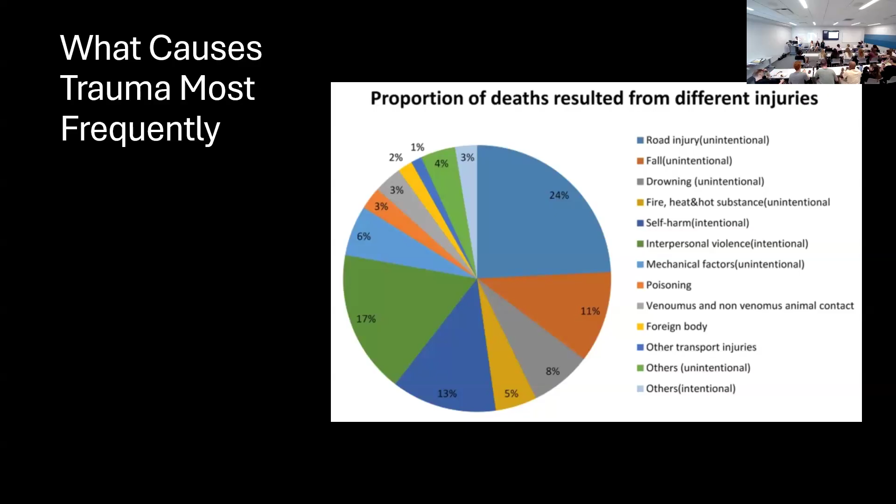They can't hear. Got it.

Why do they matter? If you think about the importance of transportation systems in any country or empire that's had any amount of influence, you have to have a good transportation network, right? But if a transportation network isn't done right, it can cause problems. If a transportation network is done right, what does it foster? Well, it fosters economic opportunity.

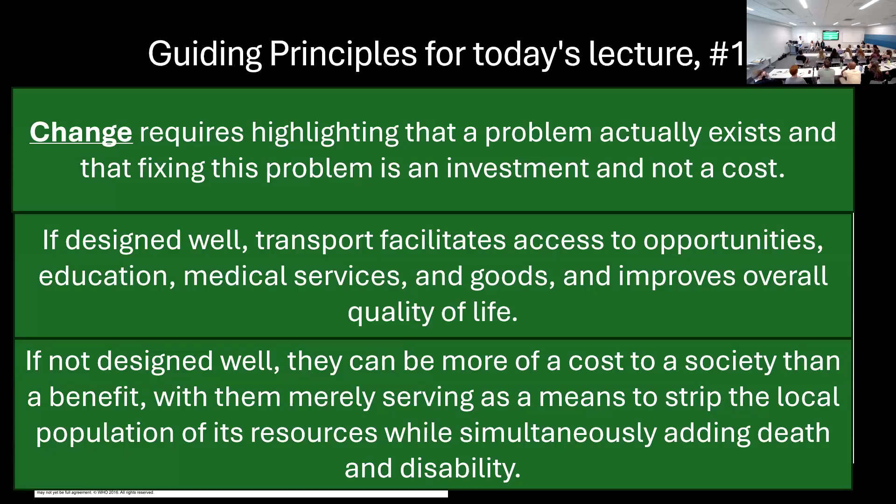If designed well, transport facilitates access to opportunities, education, medical services, and goods, right? And improves overall quality of life. But if not designed well, transportation can be more cost to society than a benefit, with it merely serving as a means to strip the local population of its resources while simultaneously adding death and disability. That last statement is more important because it kind of gets towards justice, fairness, and equity.

This is a driving lesson that one of our first fellows, Dr. Solomon, gave me when we were traveling through Ethiopia. Let's play this for you.

You guys can listen. Dr. Solomon, what's it like driving in Ethiopia? Wow, very difficult driving, but you have to be cautious and fast, very fast, because you see a lot of cars coming and the people are also going here and there. Look. Are there no crosswalks? There is a crosswalk, but they don't follow the principle of traffic. Simply they came and they challenge you. Interesting. What about stoplights? No stoplight at all here. Stop signs? I haven't seen here. What about a yield sign? Yield also is not available. The stop sign is removed sometimes by hooligans. They remove it and they sell it.

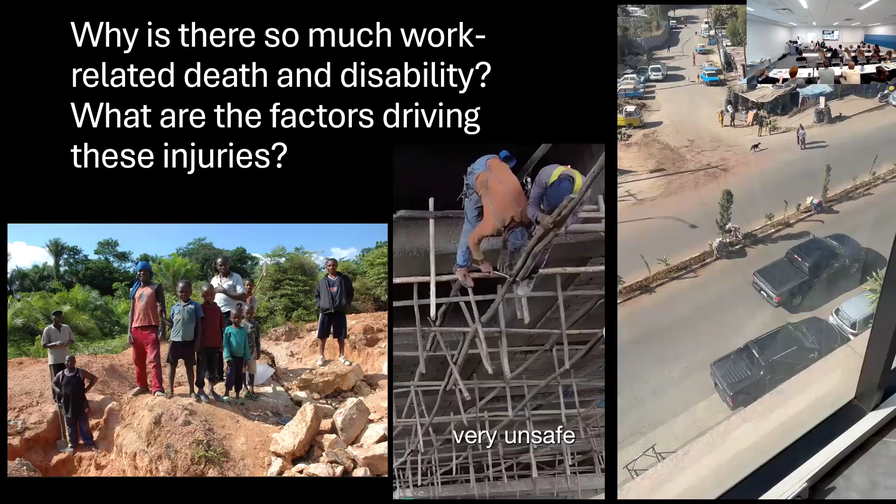All right, why is there so much work-related death and disability? What are the factors driving these injuries? Here's an example. You can see some children working in a mine, so you have child labor occurring. And how skilled do you think a child is at digging diamonds or platinum or gold out? And you can see they don't have much personal protective equipment here.

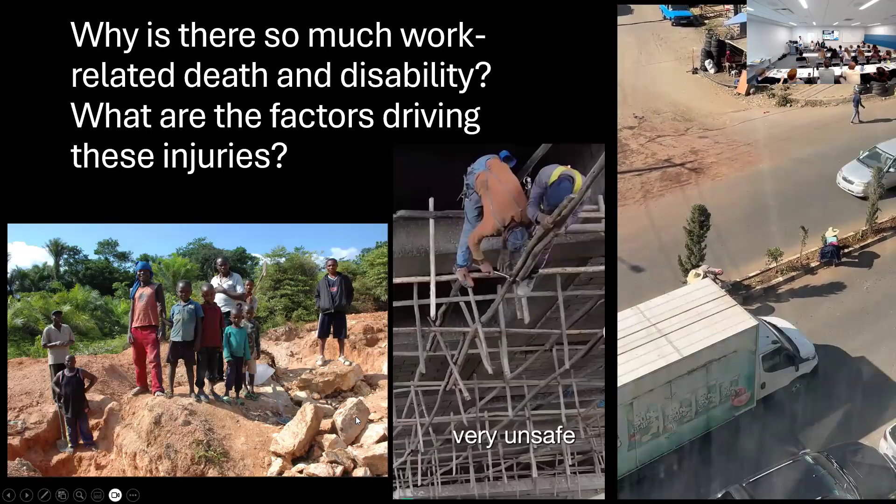Here's some individuals working on scaffolding in Ethiopia. I think Bakker took this picture while we were in Ethiopia. And I'll just play this here. This is just in my hotel, showing some people working on the side of the highway. If somebody's working on the highway in America, there's some type of safety barricade put up. But this is how these people work. These are hardworking people, with all these risks for injuries. You can see why their trauma centers are so busy, and why work-related injuries are so high. See, they're having to beat the dogs away with a stick.

Statistics. So when they polled construction workers in Ethiopia in one study and looked at their risk of a work-related injury, 84% of construction workers in Ethiopia had a work-related injury. 84%. High, right? So why is this? Progress, if not thought out, can come at a heavy price.

One of the things we mentioned at our last lecture was what is driving this trauma epidemic. There's this process called chaotic industrialization, a process where you have certain industries being built up at an uneven rate. You have a continent like Africa that's rich in natural resources, particularly resources that we want now for developing renewable energy technologies, as well as powering our old technologies, such as copper. Richer nations want these resources.

If we need to get them out, roads need to be built that connect to these mines. And there's nobody necessarily looking over these mines and making sure they're safe. So you have industry in mining and transportation being built up quickly, not necessarily well thought out. We'll discuss that a little bit. And the healthcare infrastructure isn't being built up as well.

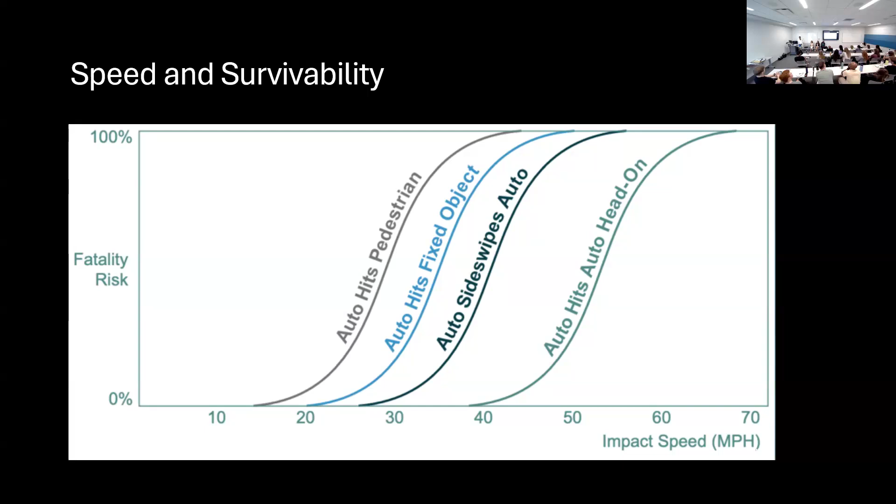So yeah, let's look at this. So we'll just go through a couple things. So speed and survivability, you kind of talked about that, right? It's kind of obvious. The higher the speed, the more likely the mortality. And so these are things that you want to take into account. What is this here? Minimum lane width.

So at least in the US, we have what are called controlling criteria. So any road built with federal funds, as well as especially any interstates, have certain criteria they need to meet. If they can't meet that, then an agency has to prove to the federal government why they're not meeting that and that it's not going to cause a significant safety or operations issue.

So lane width is one of those. And again, this lane width varies based off your roadway type. So on our interstates and freeways where people are going to be going faster, we want wider lanes. You don't want too wide, but you want wide enough. So 12 feet tends to be the standard on our interstates, and 10 to 12 feet for our arterial. So those are our higher speed roadways.

They can be freeways, they can be roadways like Southwest Traffic Way up here might be considered an arterial. And so those you want a 10 to 12 foot width. Getting too narrow, you run the risk of people leaving their lane, getting into the opposing lane. Sometimes on local roads, though, we want that narrower lane to slow people down because they do feel cramped and you have that risk compensation that you inherently have that you will tend to drive down.

So yeah, when we have narrower lane widths, we run the risk of what are called run off the road crashes, where you leave your lane and go off the side of the road or into the opposing lane where you would have a head-on crash, as well as your sideswipe crashes of hitting the vehicle next to you. And we have data that helps kind of show these and the association between crashes.

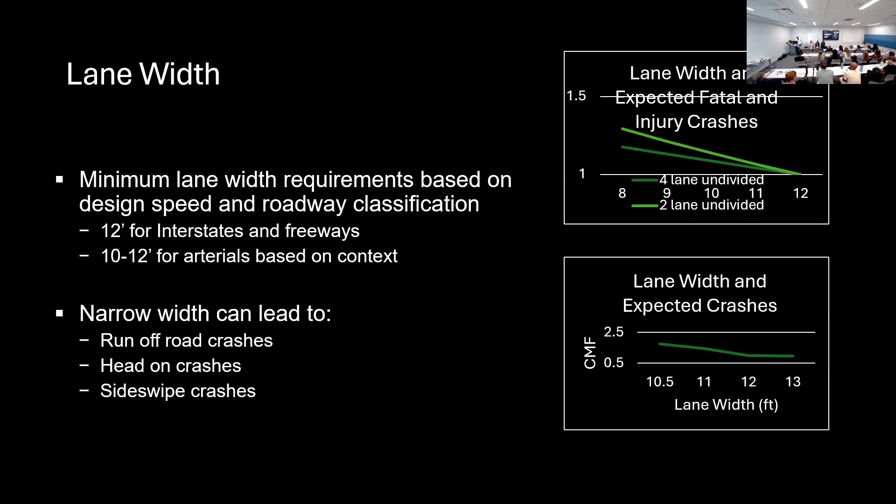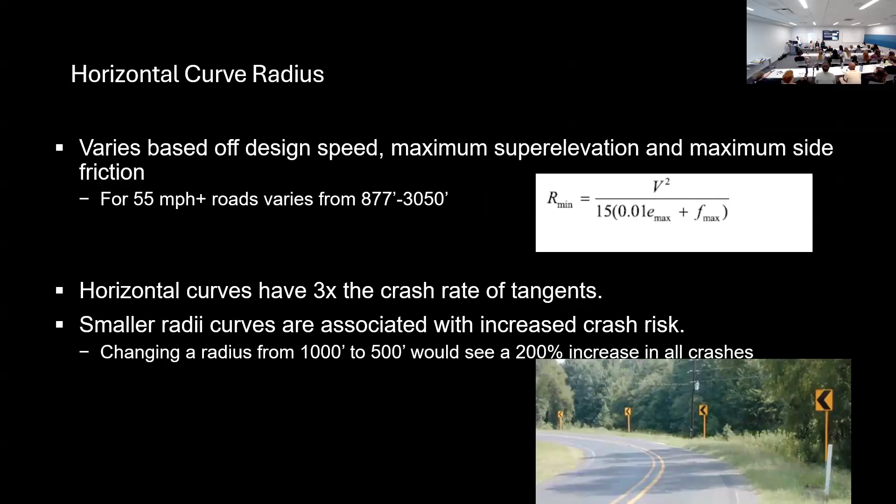And not only does lane width matter, shoulder width matters. Important part. The horizontal curve radius matters, if you can imagine. Curves tend to be one of our most dangerous. Curves and intersections are really where the majority of our fatal crashes happen. So a curve segment compared to a tangent segment, so a straight segment, you'd see about 3 times the crash rate on a horizontal curve.

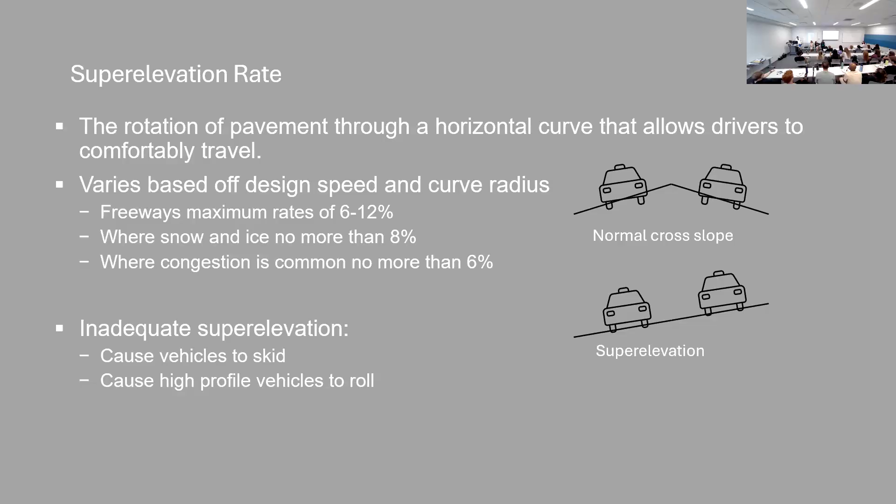And then the rotation or the superelevation rate? Through curves, we get what's called superelevation to kind of help with that centripetal force and help keep you in your lane so you don't skid. You have to think about stopping sight distance.

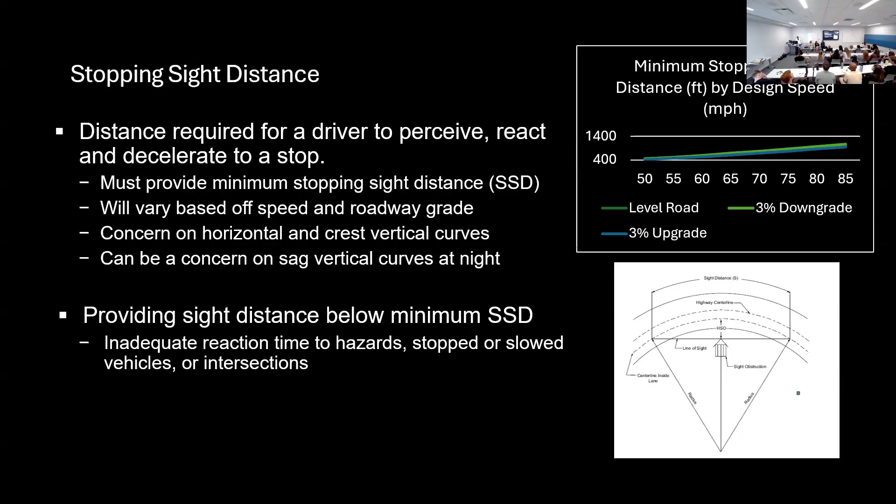On our roadway, again, just making sure you're able to see far enough ahead that if you come up on a slow vehicle or a pedestrian or an object in the road, or even an intersection, that you're able to properly react. And then you need to take that into account when you're talking about crest curves, like when you're going over a hill. Yeah, coming over a hill, or going down. Going down, especially at night, the down tends to be the biggest issue.

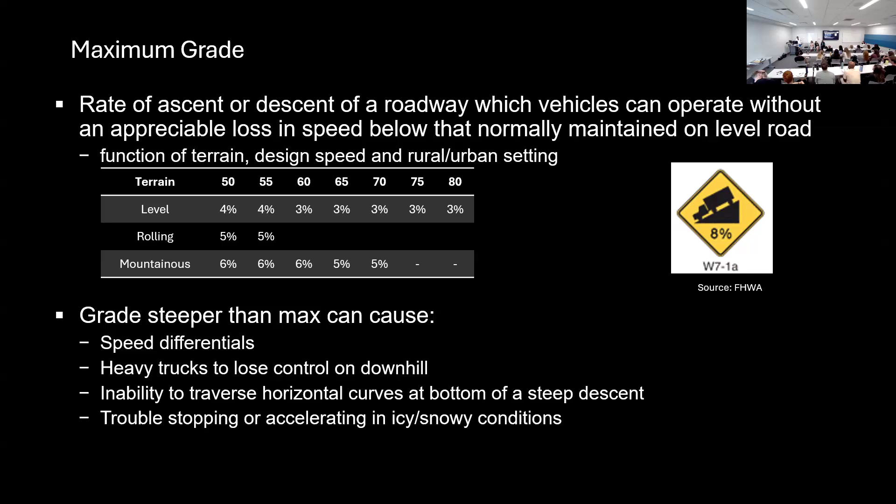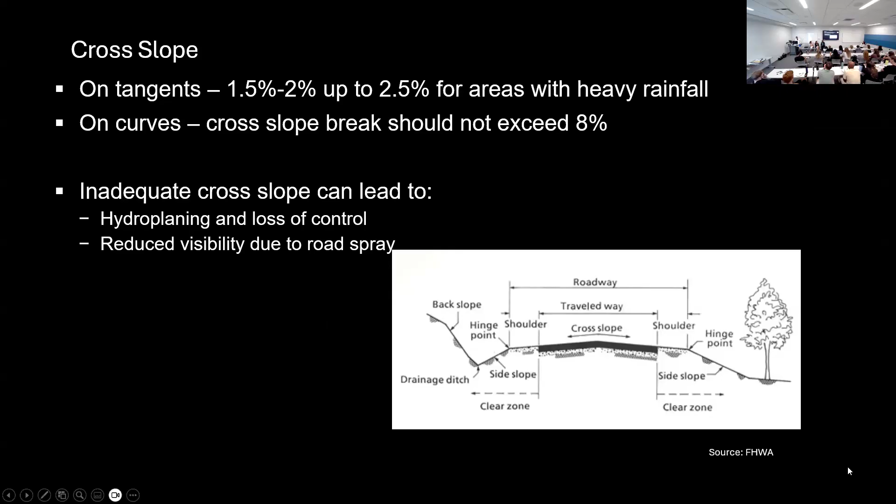And then you have to think about grade. Of course, anybody who's driven through Colorado or a mountain knows how important that is when you're going down a big hill or mountain. Cross slopes. This was something I thought was interesting, to help prevent hydroplaning. So you get the water off the road. Yeah, they designed that. You probably don't notice, but all the roads that you're riding on are slanted a little bit to wherever the drainage system is. And it reduces the road spray.

Roadside safety. Not only do they design the road itself, but then this I thought was so interesting, the area outside the road is designed. So if you go out, you can possibly recover, or if you go out, it's not so steep that you flip. And if they can't meet that, then there needs to be some type of barrier there that's designed such that it can crumple when you hit it.

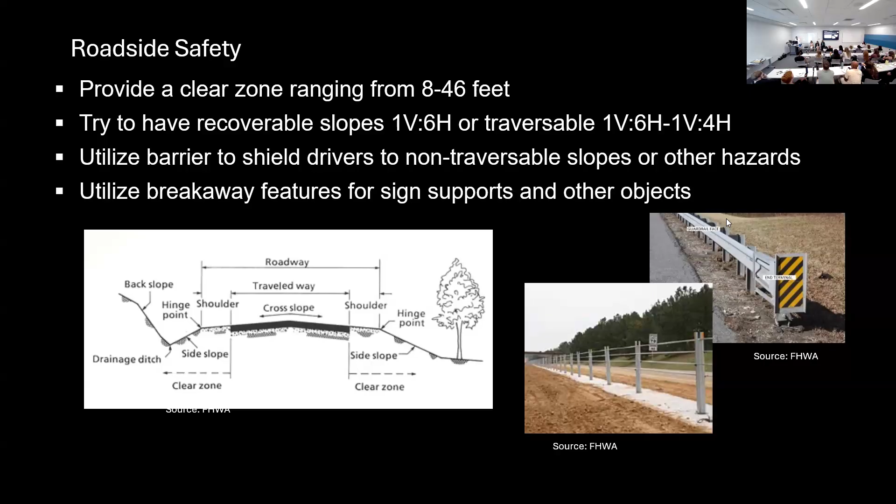There's so much thought that goes into a good road network, right? When I went through this with you, I thought, wow, this is so enlightening. Of course, we talk about cross points, roundabouts versus intersections, and the advantages of each of these, different ways you get onto the highway.

All of this is well thought out. And then the things that are put in, I thought that was really good that you talked about, like rumble strips that can help. Rumble strips have kept me on the road, I will tell you that. Keep people in their lanes, as well as when you have an intersection that you aren't expecting, using those to draw that attention. Missouri uses them a lot in work zones because people aren't paying attention. They'll just drive into those cones otherwise.

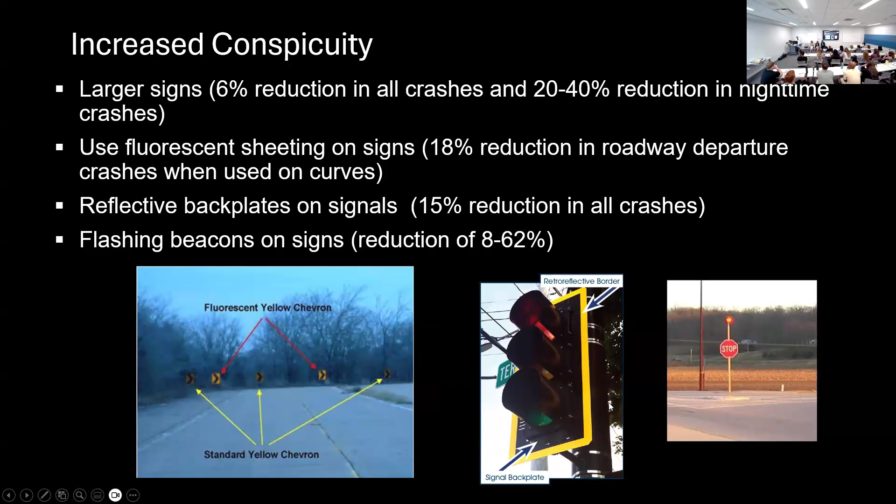And then the thoughtfulness that goes into signs, how large the signs are so people can read them. And then this was something I thought interesting. You said, if you just put this reflector around a stoplight, it can actually decrease crashes. Just that. Thoughtful, small addition. Increasing attentiveness and awareness. So, and then just to move into work-related injuries, these are from Dr. Kinda.

Hey, Patrick, can you hear me? Yes. Hey, did you want to talk about these? Yes, I can. Okay, I'll let you. This is Dr. Kinda. He's from Zambia. He's one of our former fellows. What would you like to say?

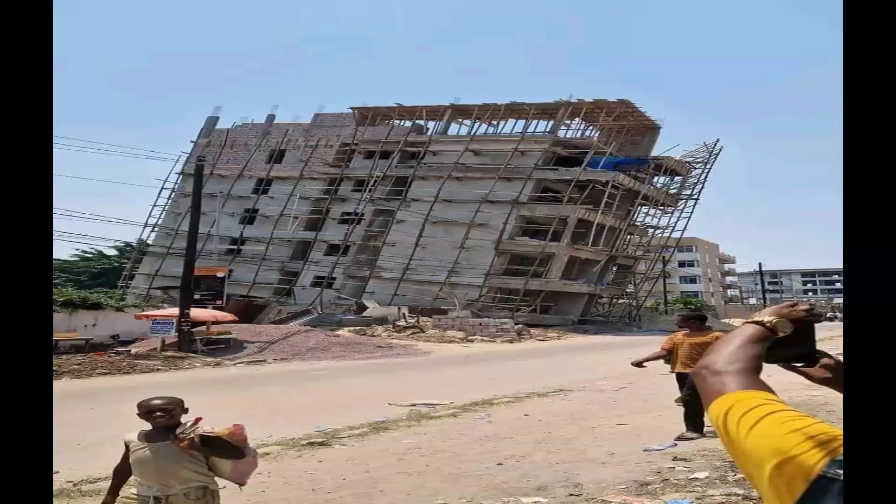And what is happening? You see, the time I was there in Kansas, I went to the DMV. I did my test, the theory, and did the practice, and I got my license. But it's not the case here. Here, they can just bring me a driving license at my office. I don't need to go for the test. And most of these gentlemen who are driving don't know anything about road signs. They don't know anything about the rules of the road. They just know how to drive. And this is also one of the main causes of accidents.

And on this last slide... Was this built that way, or was it built straight and then it started to lean? Yes, it was straight, and it started to lean. Actually, the time I was in Kansas, I was just following the news. It was happening, and it started to lean. And this happens when you do anarchic construction, and even the people involved in this construction are not qualified. And we have many of these cases, and this is also one of the main causes of trauma and injuries in Africa.

I think that's what I can say. One of the more common traumas I can remember treating when I was in Africa was some type of building collapsing on someone. I just found it so interesting. Yes, but recently, as I said, motorbike accidents are becoming very common because most of the companies in rural areas and in big cities are now using motorbikes. I think because people can move fast, because you are not trapped in traffic jams and everything. But actually, I can say the majority of those who use those motorbikes...

Whoever has to go, yeah. Don't be late to class. Thank you for coming, guys. Hey, Patrick, I just have to make sure I get the medical students out of here so they don't get in trouble. Okay, that's okay. All right. See you guys. We still have some people here, so we'll keep going, Patrick. But thank you all for coming. Okay. Hey, Patrick. Yes. Sorry, I just had to let them go. Anything else you wanted to say?

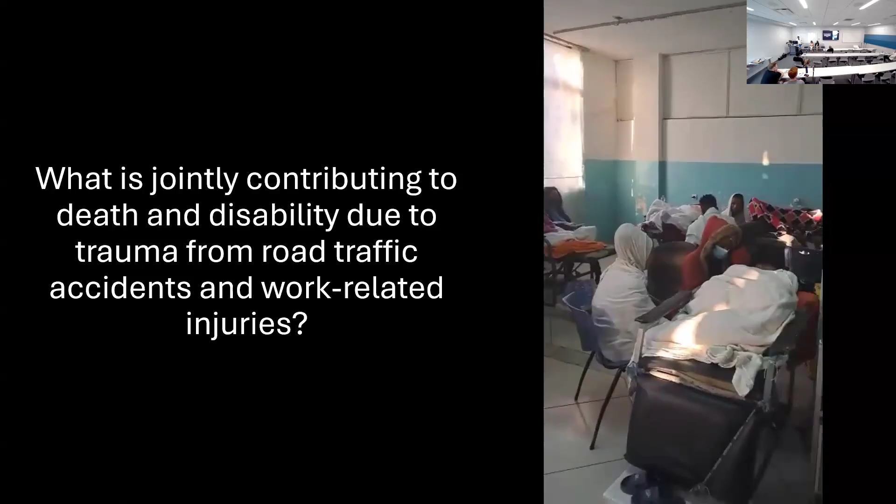Femur fracture, pilon fracture, pelvic fracture, every fracture. How long have they been here? Some of them more than 20 days, 30 days. We can ask them.

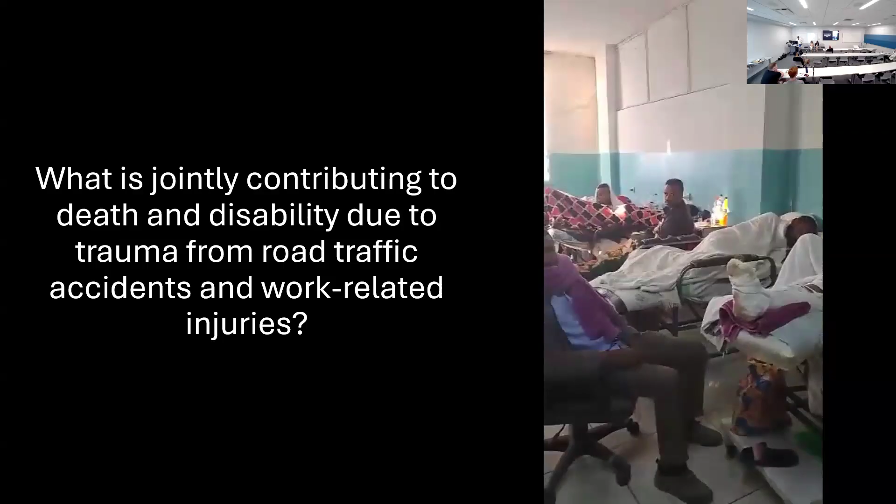For how long have they been here? 15 days? 5 days? 4 days? 22 days. Yeah. This one, a surgeon came from America, so he wants to see something.